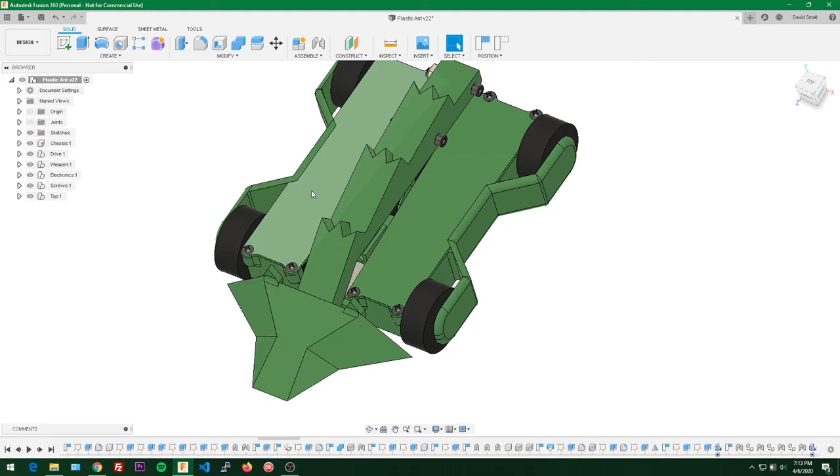If we take a look at this guy, you can see we've got the lifter, the wheels, the cool side panels, the weird fur pattern thing—I'm not sure what that's referred to as—but we can even take the top off and take a look at the guts inside.

You can see we've got our power switch, our battery, receiver, servo, our regulator, speed controllers, and one neat little feature is that the lifter is actually fully functional within the CAD design.

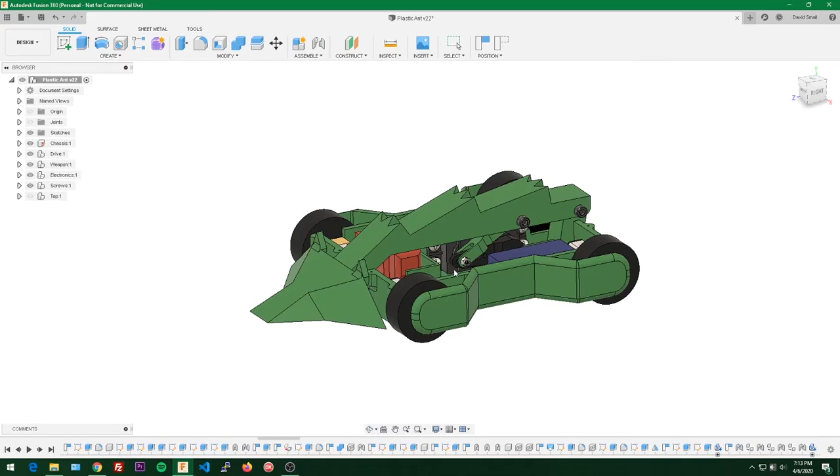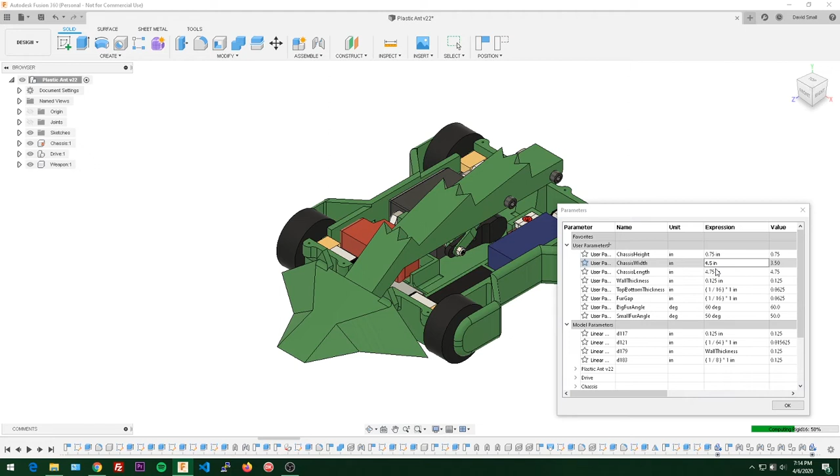And the best part of all of this is that this is fully parametric. Parametric modeling is a modeling technique that uses parameters—parametric parameters, that's where that comes from—variables in other words. I can do something like make the width two inches wider, and the entire thing rebuilds itself all automatically without me having to redo any of it.

I don't have to reposition anything inside. I don't have to reposition where the motors go. I don't have to change where these extrude out from. It does it all for you. That's what makes Fusion 360 stand out so much in the world of free CAD programs: the ability to model things in such a powerful parametric way.

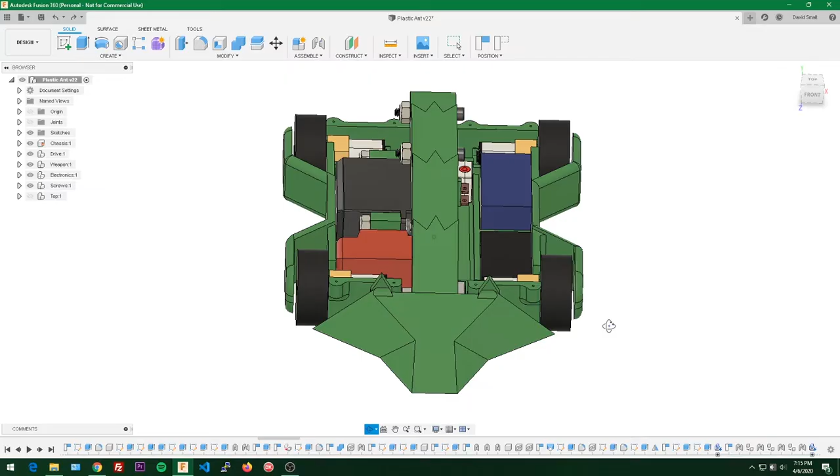So let me put that back. It truly is a fully fleshed out CAD design, and it can be your fully fleshed out CAD design. All you need to do is follow along at home. So without further ado, let's get started on part one of our Foxant Plastic Ant CAD-A-Long.

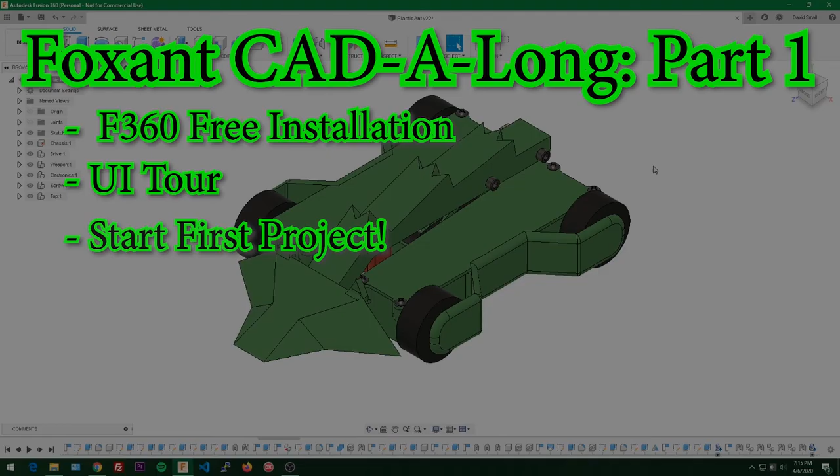In part one, we're going to cover the following things: how to install Fusion 360 for free as a hobbyist, then explore the user interface, create our first project, get started on the chassis, and create some of the inner components. So let's jump right in and download our CAD program, Fusion 360.

Here I am in my internet browser following the link in the description. You do not want to click Subscribe, because that'll put you into a monthly subscription you have to pay for. You don't want Free Trial either, because that lets you use it for free a little bit and then you have to pay for it. Commercial subscription you have to pay for. Startup use you have to pay for. You want to click down here on... just kidding, that's also commercial subscription.

All the way at the bottom here we have 'Activate Fusion 360 for personal use,' and that's what we want to click on. Then on this page, if you already have an Autodesk account, use that, but otherwise create a new account, fill in your information, and it'll take you to this page. If it keeps you up here, just scroll down and click 'Download Fusion 360 for personal use.' That'll start downloading—click it when it's ready, follow the instructions, and then open up Fusion 360 and we'll get started and look around.

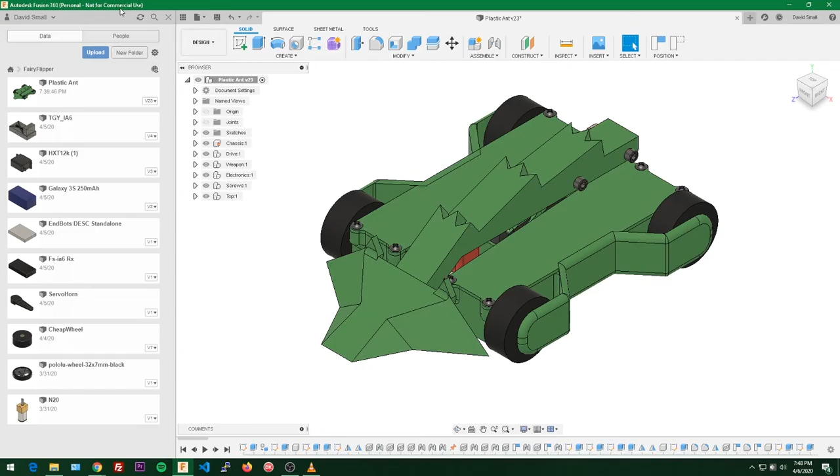So here we have our data panel toggler, that's kind of like our project explorer. Different projects will go in this window here, and we can close or hide that as we wish.

Then we have our typical file menu, save as, save new, open, and so on. Then we have our toolbar up here with all of our various tools. On the left here we have our browser, this is kind of like a file explorer on your computer. We have folders, and instead of files, they're components, and inside of components are more files and more folders.

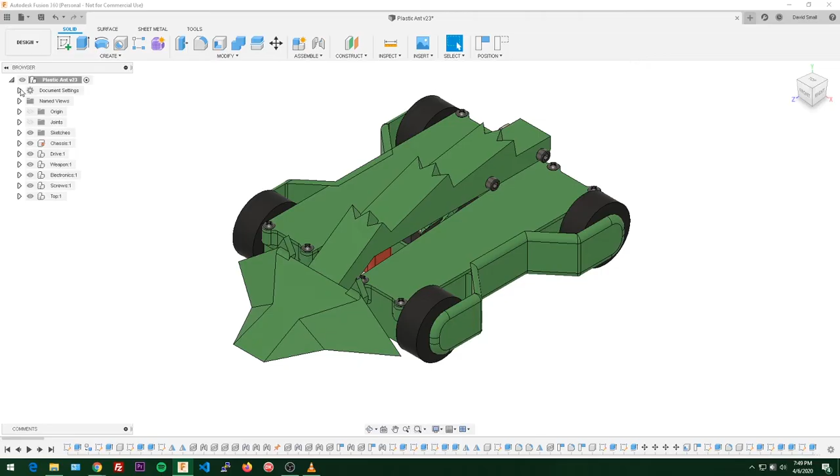So we can look at document settings here. This changes if we want to use inches, millimeters, meters, whatever as our default unit. I'm going to keep it on inch, you can change it to millimeter if you want.

Then we have our named views, we're not going to bother with any of that. Origin is your center in 3D space, you got your XYZ, your various planes. Joints are when you stick components together, so you can see where all those guys are. I usually keep that off unless I want to find one because they're a little annoying and they get in the way. We have our sketches, and then we have our actual components.

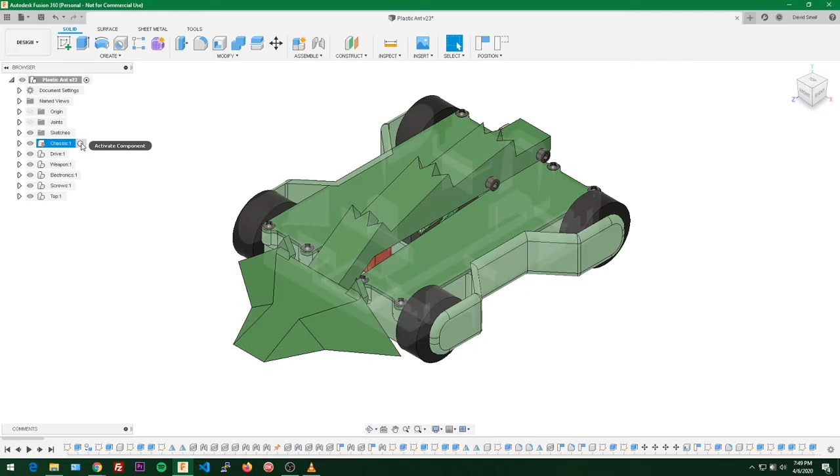So we have our chassis, we have the drive system, we have the weapon, electronics, screws, and the top. You'll notice when you hover over these, this little thing appears, and that eyeball or radio button is what is the active component. So if I were to check this, now our chassis is the active component, and everything else kind of fades away so you can look at it a little bit better.

Whenever you're adding new features to your design, it'll show up in the timeline of whatever the activated component is. So it's really important to make sure that the component you're working on is activated. We'll talk about that more later.

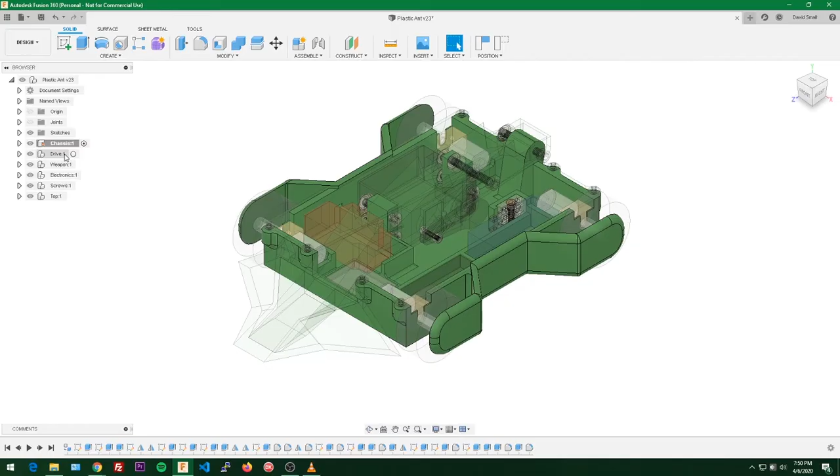Then we have the eyeball over here. So let's say we wanted to hide the chassis, we could click the eyeball there, it disappears. We can make the top disappear also, and we can look inside and check out what's going on.

If we open up one of these, you can see that we have more pieces inside. So inside of top, I have a top panel, another top panel, and then these are the various screws, and I just keep that all in the top section. So it's important to stay organized, use folders, that way you don't have a million different components on your sidebar here.

Now if we go down to the bottom, we have our timeline, and this is every single action I took in making this robot. So every time I made a sketch, every time I extruded something, every time I added a fillet, anything like that will show up in this timeline.

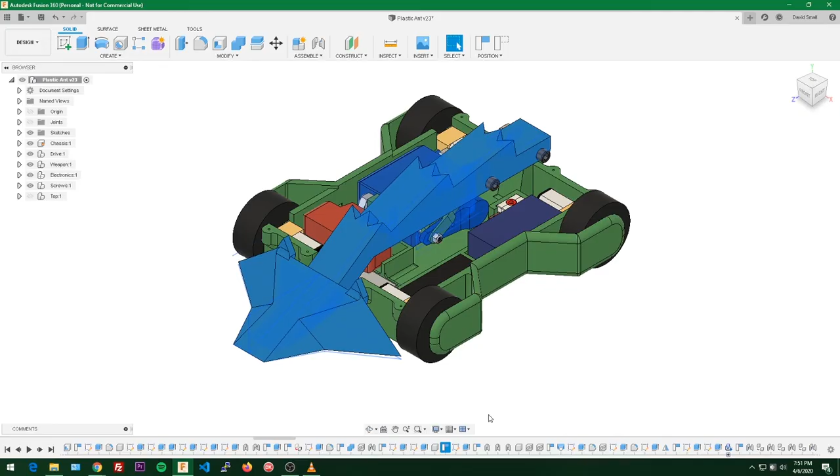And then we can even go down here, right click a random one, and roll the history marker here. And this will take us back in time to when I only had this much of the robot done.

Then we can use these buttons to step ahead, and it shows every step that was done to create this robot. You can even click play here and it'll do a little animation starting from the very beginning all the way to the end, step by step, of every single feature that I added to the robot.

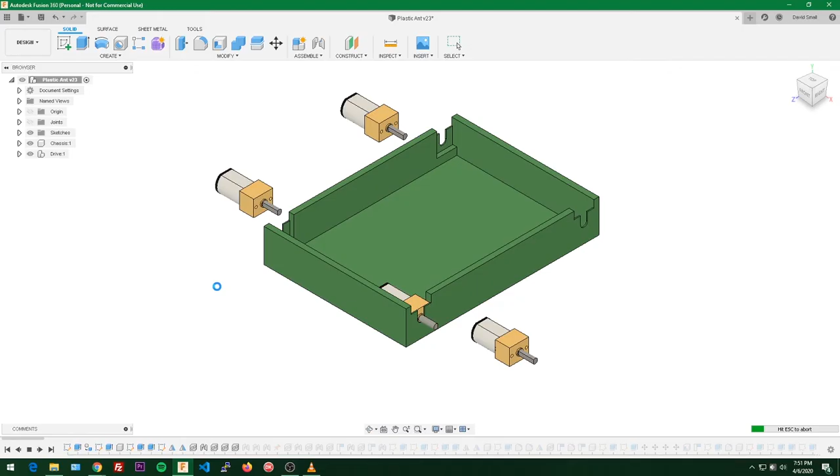And that's pretty neat. And then we can use this button to go all the way to the end of time, so here we are, back to where we were originally.

So now let's talk about exploring our design view. I'm going to take my mouse here, and if you're using a trackpad, you're going to have a bad time. Please go out, get a twenty dollar mouse, you'll be much happier doing this.

So I'm going to hold down the middle mouse button and then move the mouse around, and that lets me pan around my design. Then I can hold shift and the middle mouse button, and that lets me rotate and orbit around the design.

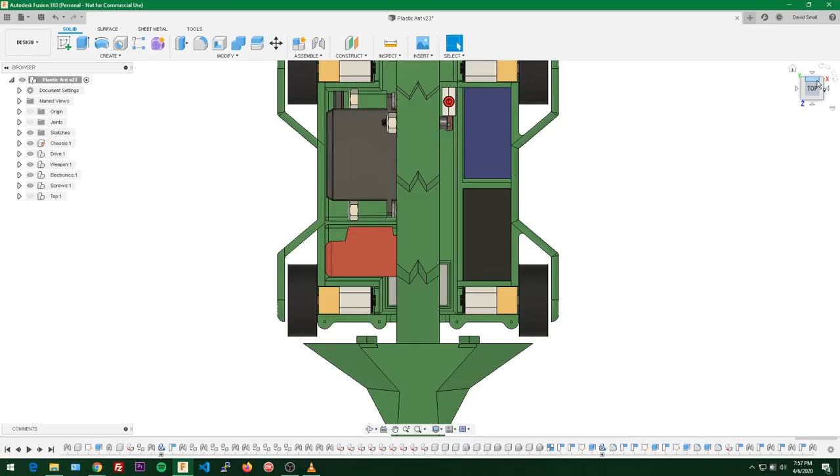You can also use the cube up here. Clicking the home button puts it at your home view, so you can click on top if you want, look at the top, look at the front, look at the left, look at the corner in between the two, all that good stuff. Now you may have noticed that the scrolling is backwards.

It's a personal preference sort of thing. If you don't like that, click on your name, go to preferences, and in this menu go down to reverse zoom direction and check or uncheck it to adjust it however you like.

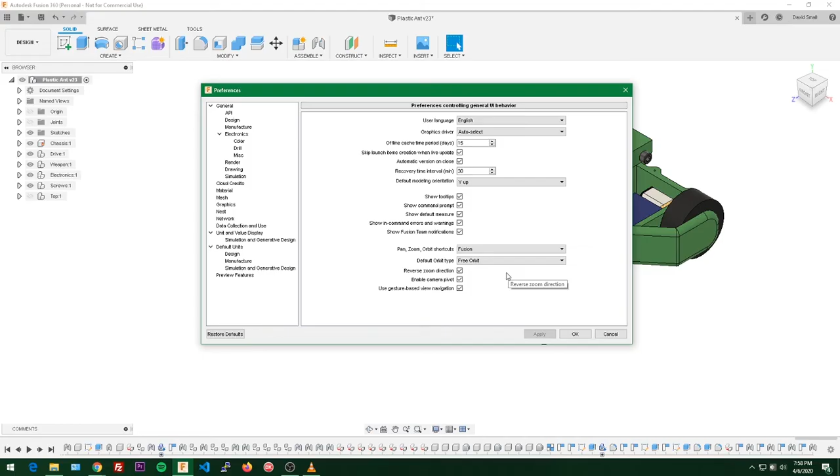With that, I believe we are finally ready to get started actually making something. Let's go to our home section and do a new project, and put in the name of our project. It's Foxic, but it's an ant, so Foxant.

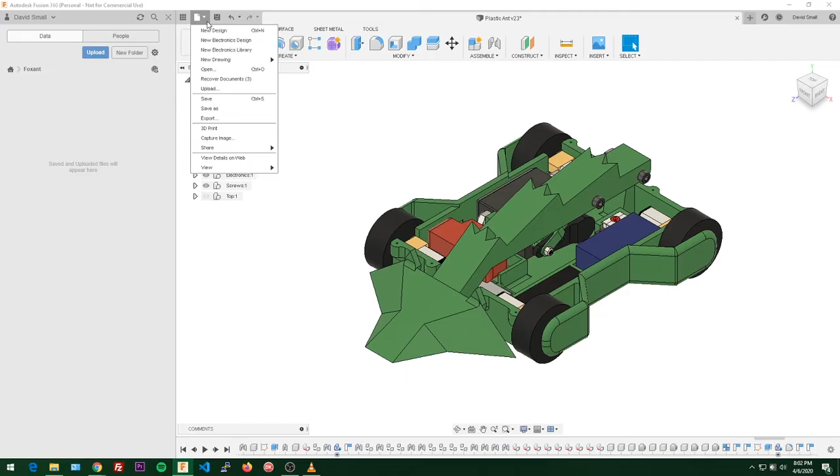Let's open this guy up, and we'll do File, New Design, and here we are. We'll close this one out, because we are all about our brand new design here. So we will call it Foxant V1. You can see here inside the Project Explorer, the file has been added to our project folder.

So now we have our blank canvas. We can get started on making the chassis. The very first thing you want to do when opening a new file is ask yourself, are there going to be multiple pieces or just one piece inside of this file?

We're going to have multiple pieces, which means right off the bat we're going to want to create a new component. So let's right click this guy, new component. That's how I brought that up. Then we'll double click on it to change the name, and let's call it chassis. Then we'll right click it again, make another component, and let's call this one electronics.

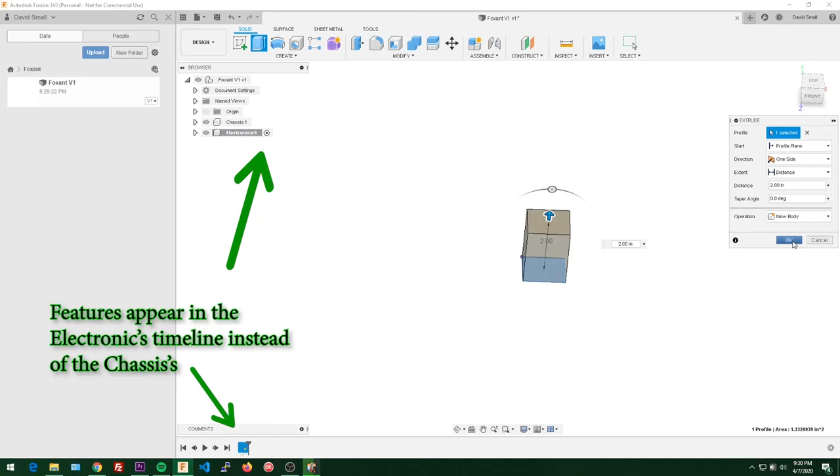So now we have two pieces of our robot. Now it's important to make sure you have activate component on the correct component that you're working on. So if I were to be working on the chassis and I added a sketch and started doing stuff in here, I'll make a little cube real quick, and that's my chassis.

If I look at the timeline, you can see I created a sketch and then extruded it. But if I wanted to know specifically what did that, I would click on the activate component here, and there's nothing in here. That's because I had the wrong component selected when I made that sketch and did that extrusion. So I'm going to go ahead and delete those real quick.

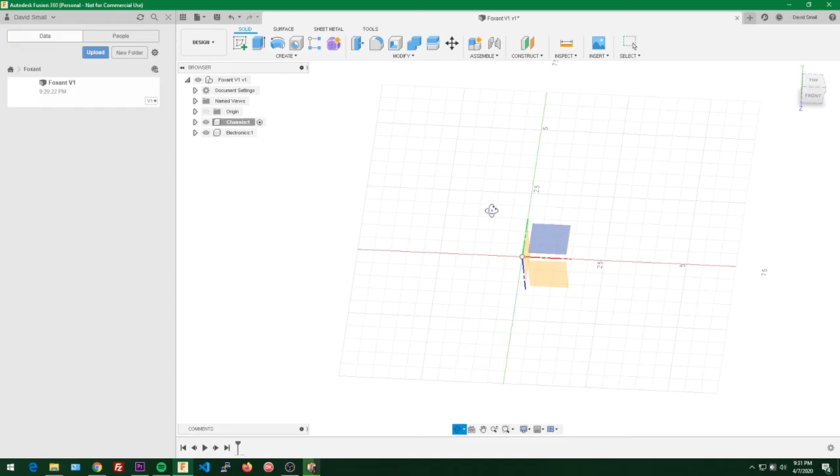With the correct component activated, let's make a new sketch. We can do that a few different ways: use the create sketch button up here, or push S on our keyboard to bring up the shortcut menu and do create sketch from there, or type sketch and do create sketch that way.

So the next thing we're going to do with the sketch tool selected is pick which plane we want our sketch to appear on. The way sketches work is you draw it out and then extrude it to create a 3D object. I'm going to choose the bottom here, so we can CAD sort of like a top-down view and then extrude that into a 3D object.

With the sketch now created, you can see we're in the sketch menu. We have all these different geometry tools and constraints and a sketch palette over here on the right. So we're going to make a box basically.

I'm going to push S on the keyboard and use this center rectangle. If you don't have that there, you can type center rectangle and it'll appear. So we'll click on that. The first thing we want to do is create where we want our center point to be.

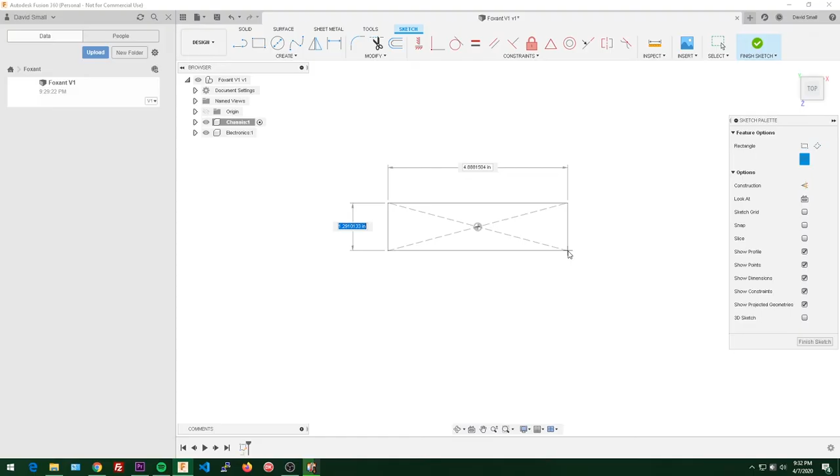There's not really anything going on here except for the origin, so we're going to go ahead and put our rectangle there. Then I'll move the mouse to get an idea of how big we want this to be—something like that roughly. And I'll click again to confirm it.

Now the rectangle tool is still active, so if I were to click again, it would make another rectangle. I don't want to do that, so I'm going to hit escape on my keyboard, and that'll let us use our mouse normally to click on various pieces of geometry. So we have this cool little box.

The lines are all blue, as you can see, and blue lines mean that they are not constrained. We can grab them with our mouse and move them around and stuff like that, and that is not what we want.

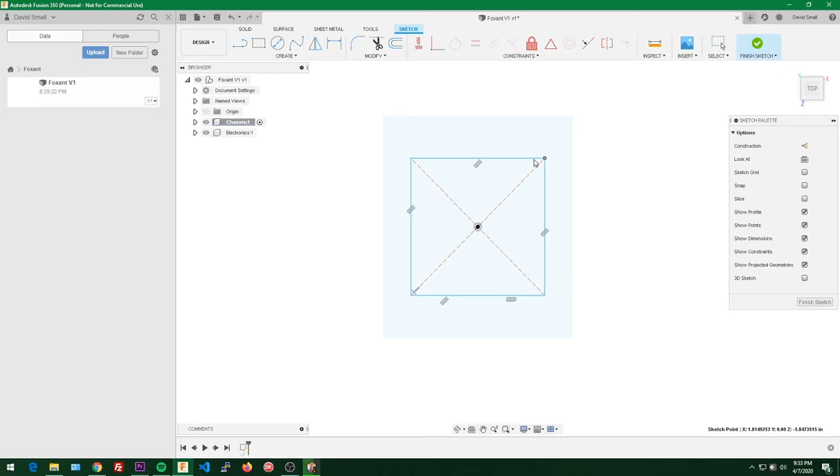We want every sketch we make to be fully constrained or fully defined, and that means the lines are black. So how do we make the lines black? We do that by constraining them, using various things up here or adding dimensions.

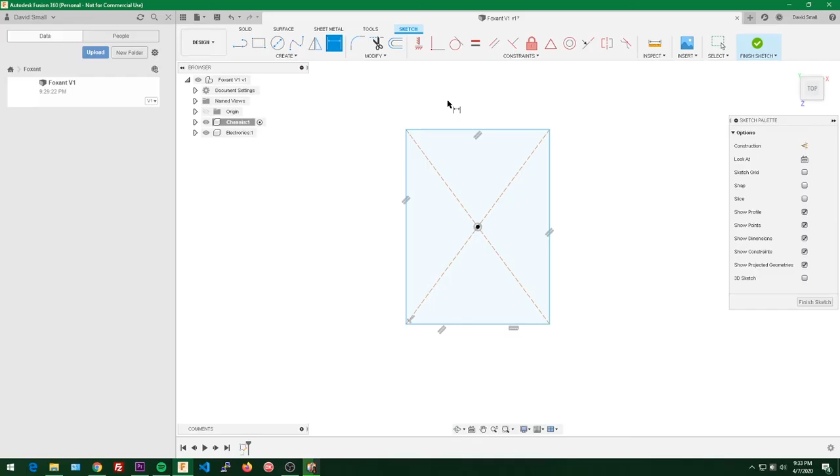Let's add a dimension to this line. I'm going to push D on my keyboard for dimension—you could also use the button there—and click on the line I want to define. Then, moving the dimension to where I like it, I'll click again, and now we have a little box asking how wide we want the line to be. So I'll type 3 and hit enter.

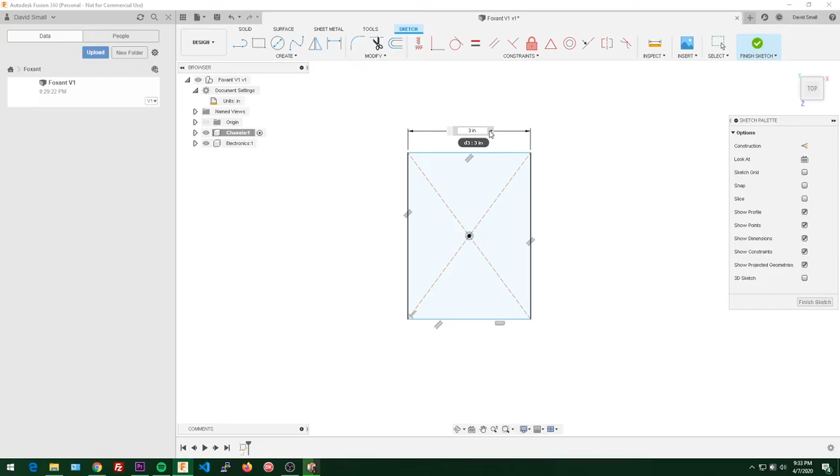And we have a cool little line. Now, 3 what, you might be asking? We are looking at 3 inches because that is our default unit. If you had millimeters as your default unit, it would be a 3 millimeter long line. But even though inches are the active unit, I can change this to millimeters if I want—that makes a really tiny square.

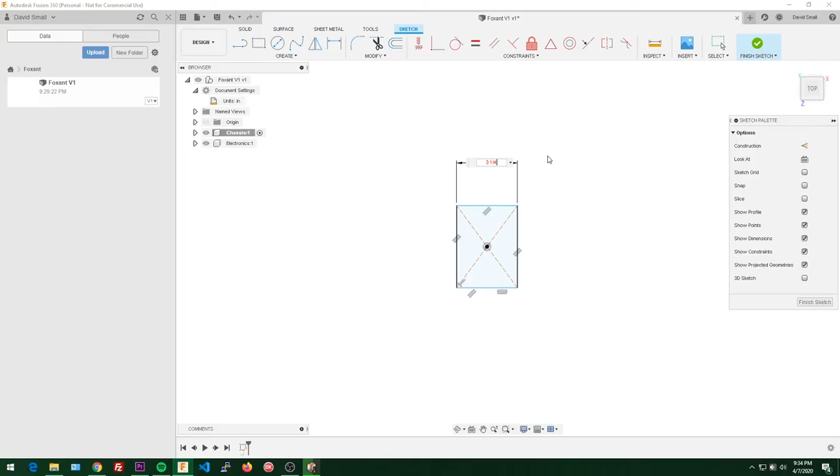You can type all sorts of different things in here. You can do 3 inches like we did earlier. You could do a decimal like 3.5, a fraction like 1/2, a decimal like 0.75, or even a mixed number like 3 1/4. Pretty much anything you type will appear as a value in inches.

So let's put that back to 3—I'm double clicking on this to edit it—and then I'll push D again to define this line as well, and we'll also make that 3. With those two dimensions, you can see our square is fully constrained. I can't grab and move it around anymore, and that's exactly what we want.

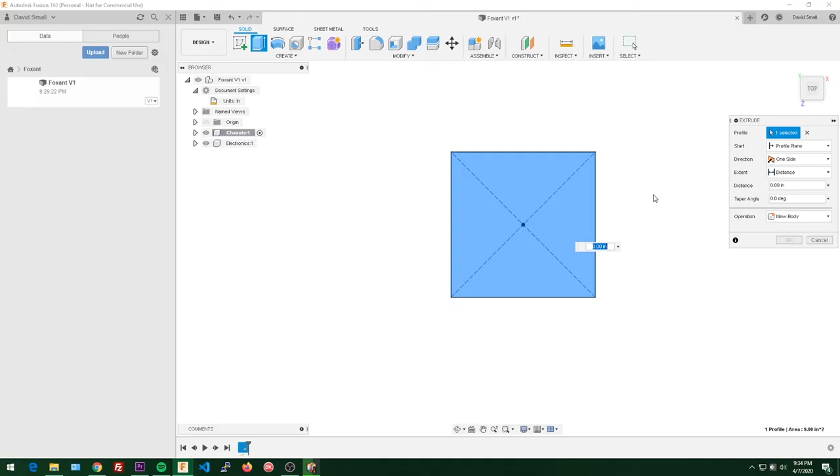So let's make this a 3D object. We can do that by pushing the E key on the keyboard for extrude, and it automatically selected the profile I wanted—but if it wasn't selected, you'd just click on it. I'll hold down shift and the scroll wheel again and move my mouse so you can see what's going on here. This little arrow appeared that I can grab, and when I move it around, it creates a 3D object using that sketch as a base, and this extrusion determines how tall it's going to be.

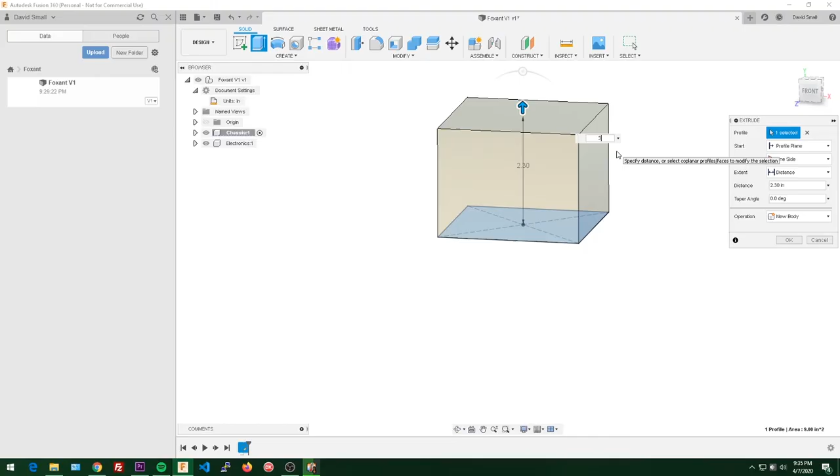So once again, I'll type 3 in here and hit enter, and you can see I made a cool little 3 by 3 by 3 cube. You can also look down here to the timeline and see that the sketch and the extrusion we added are in the chassis. So that's all pretty cool.

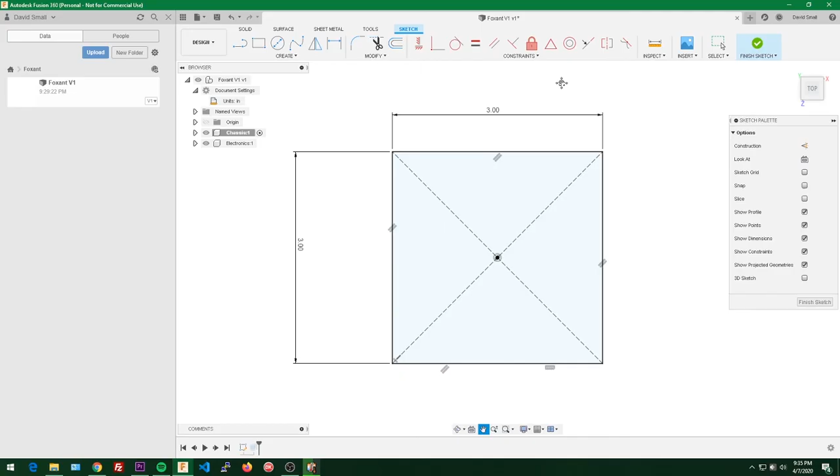Now, what if we made a mistake and want to go back and change the size of this cube? Well, we can go back to our timeline, double click on the sketch, and it puts us back into that sketch. So maybe we wanted a 2.5 inch wide rectangle and a 4-inch long rectangle. Then we hit finish sketch again, and you can see it extruded with that new pattern. This is very handy for when you want to go back in time and make changes.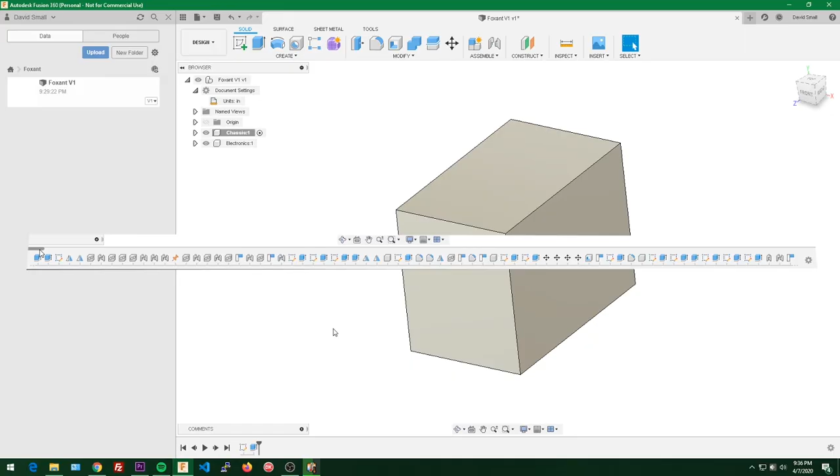Now, if you remember my timeline from the finished robot, you saw there were hundreds and hundreds of different objects in the timeline. So if we wanted to make a change in something like this, we'd have to scroll and scroll and scroll, and it would take forever to find.

So we're going to take this one step forward and add what we call parameters. Hitting S again and typing change, we'll go to change parameters, which lets us add parameters to our project. We'll hit the plus to add a new one—let's call this inner chassis width, make that 3 inches. Then another one, inner chassis length, again 3 inches—no, let's make it 4, so it's a little different. And another one, we'll call it inner chassis height, and let's just make that 1 inch.

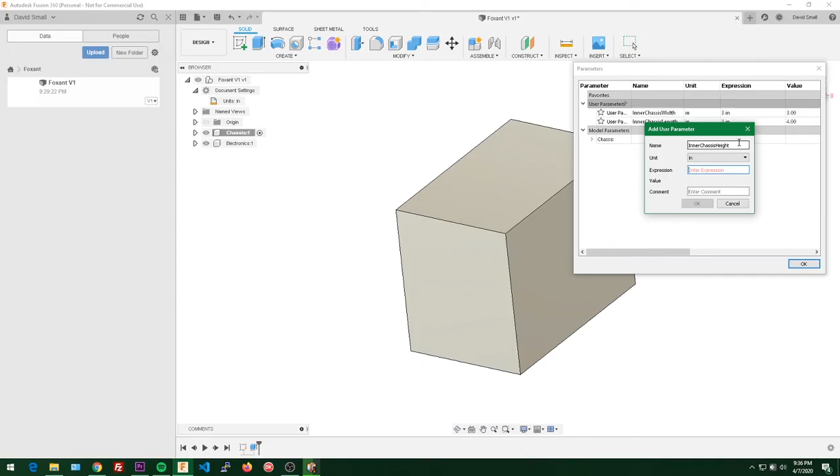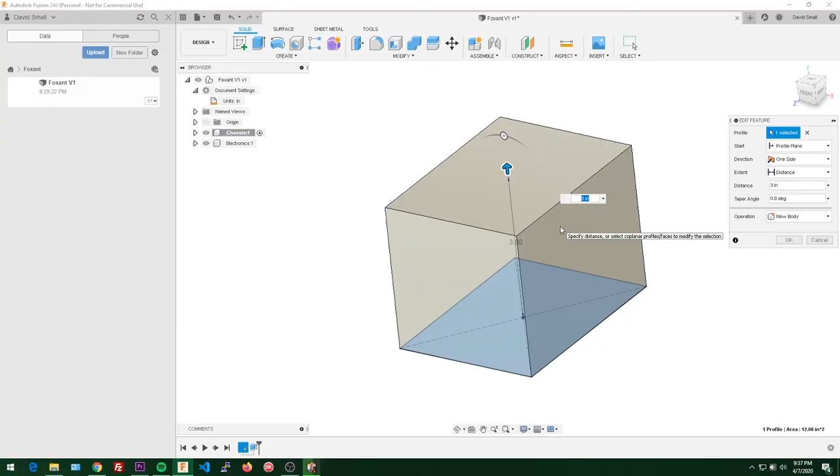So now with those parameters made, we can close out of this box, go back into the sketch, and instead of typing a number in here, we can actually use those parameters. So let's do inner chassis width, inner chassis length, hit finish sketch, and then we'll change the extrude to use inner chassis height. So now we have a 3 by 4 by 1 inch box that is defined with parameters.

So now when I want to change these, I don't have to dig through the timeline. I can just go to the change parameters menu and edit these directly in here. Let's make it 5 inches long and 4 inches wide. You can see they change all by itself automatically without you having to go back and find anything, which makes updating things you change often very simple.

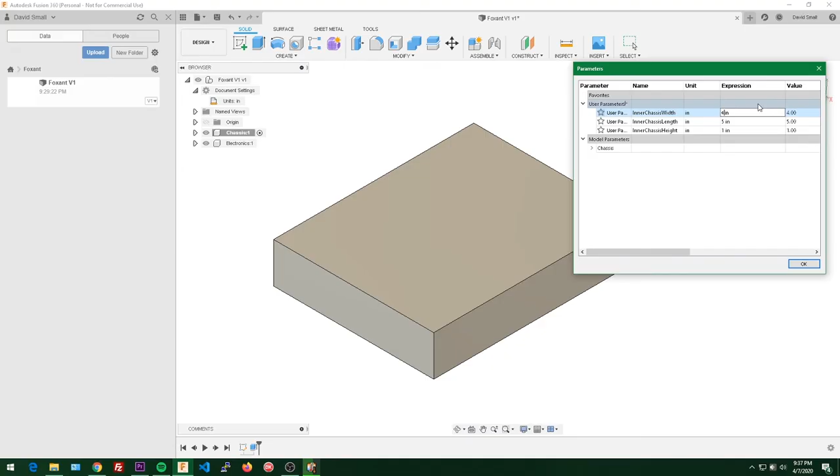So let's actually make that back into what's more realistic for this robot. Maybe 3 inches wide, 4 inches long, and we'll keep 1 inch tall. And now we have a neat little parametric box.

Now this chassis is looking pretty cool, but the biggest problem is that we can't fit anything inside of it. It's solid, we can't actually get any parts in there. So we want an open box basically.

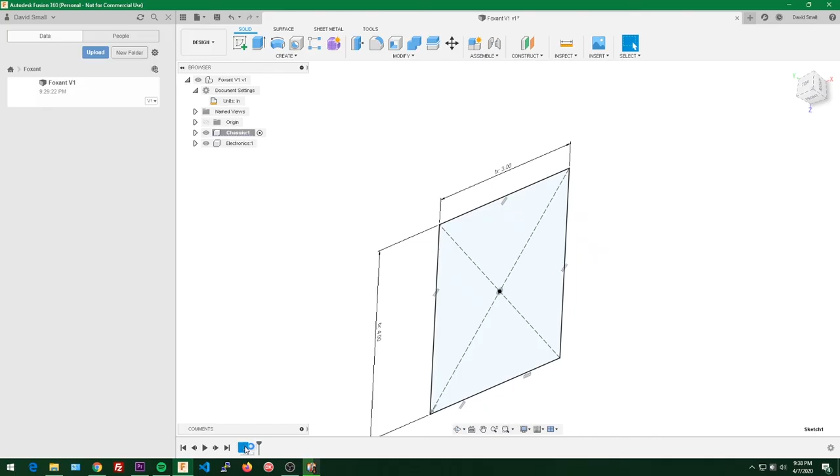So let's go back into our sketch and create what is called an offset. Pushing O on the keyboard lets me select a region, and then I can either make it smaller or bigger than what it was originally. I'm offsetting it into a different size. You can see when you make the new offset larger than the original, it uses a negative value, and when it's smaller, it uses a positive value.

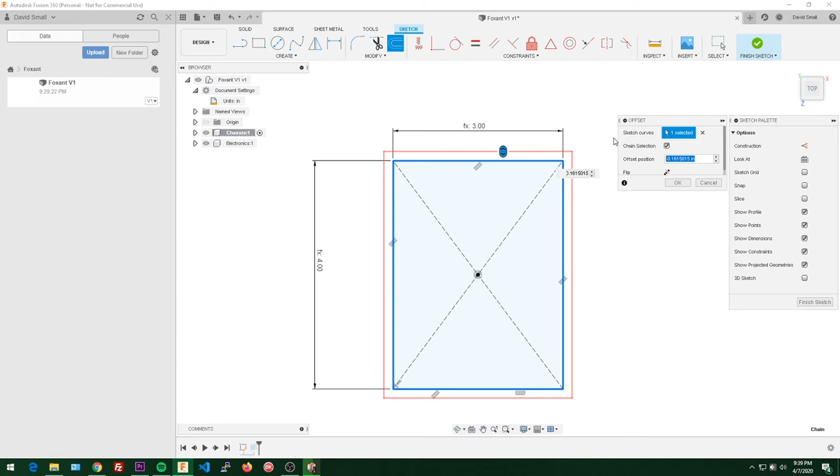So let's make this -1/8 of an inch, and you can see that creates a 1/8 inch thick wall around our chassis. Now remember, we named these parameters inner chassis width, so the space between the inside and the inside on the opposite wall, not the space of the outer part.

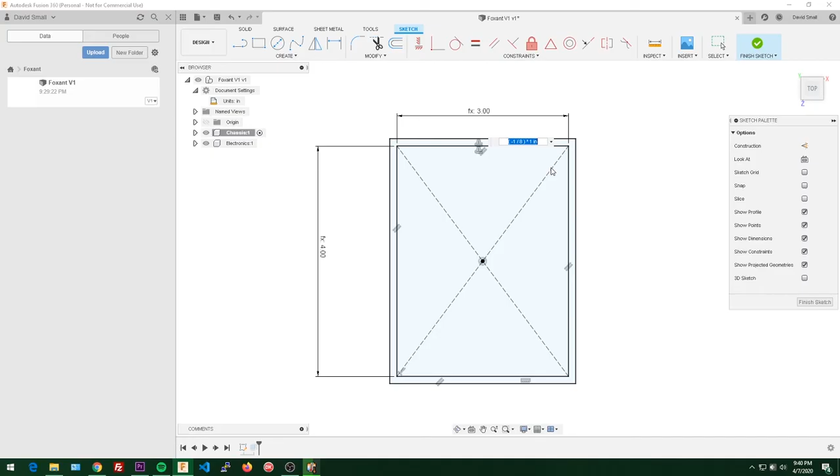So that's why I called it inner, just for that clarification. Now I think the thickness of these walls is going to be something I change often, so I'm going to make another parameter and call it wall thickness, and set that equal to our -1/8. Then we'll change this dimension to be wall thickness, and now we can change the parameter if we want to make this thinner or thicker. So maybe we change it to 1/4 later on, and it makes that wall thicker all by itself. I'll put that back to 1/8 for now.

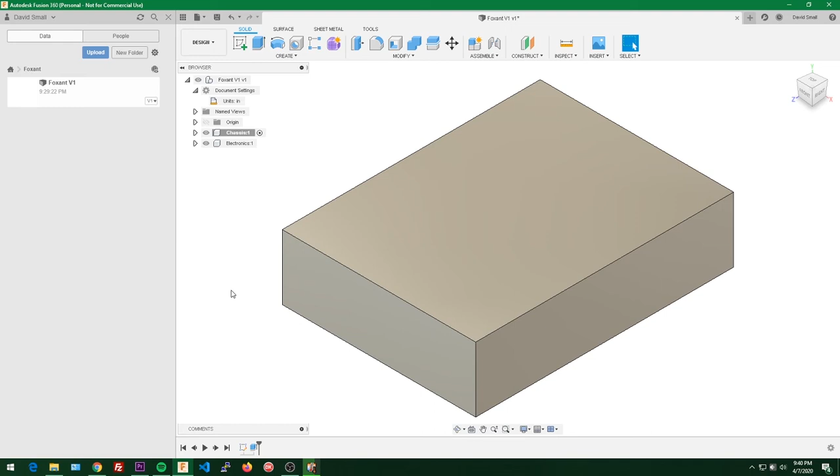Hit finish sketch, and you can see our box doesn't really look any different. So we're going to have to go back into our extrude, and you can see how it's extruding the middle part, but not the outer part. So I'm going to click on the middle section to deselect it, and then click on the outer bit so it extrudes only that part of the sketch. Then I'll hit OK, and now we have a cool little parametric wall that we can put all of our parts inside.

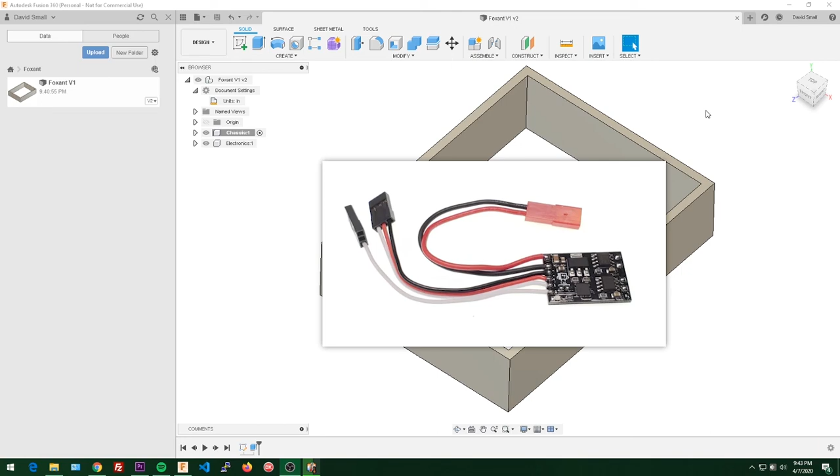The next thing we're going to do is add one of the electronic components to our robot, and let's start with the speed controllers. So I've decided to use the Endbots DESC, just because this is a speed controller I like.

There's a few different ways to import an external part. You can either download a CAD file of that part and import it, or you can use measurements provided by the vendor to make it yourself, or you can, as a last resort, order the part and physically measure it and then use those measurements to make it yourself. So we're going to do the second option.

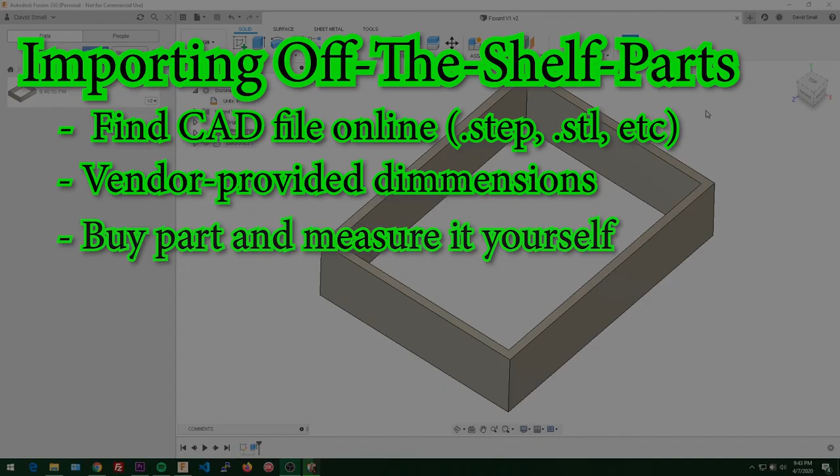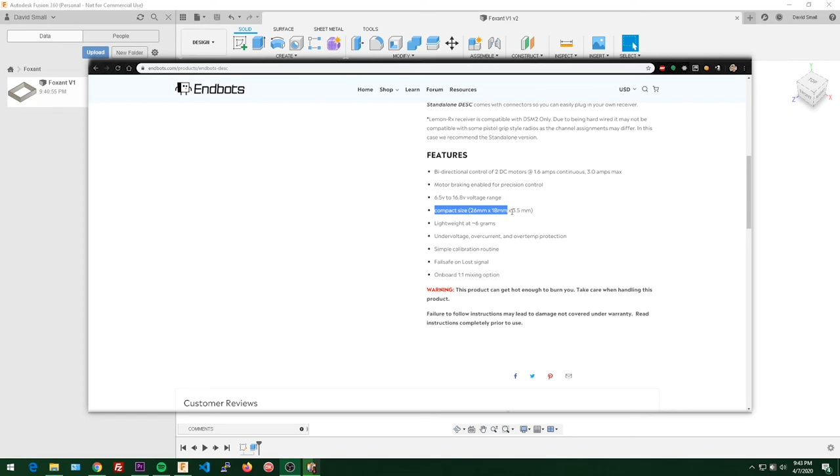We're going to head on over to Endbots' website, and if we find the speed controller, we can scroll on down, and you can see here that we have the dimensions for the length, the width, and the height. So we're going to use those values to make our speed controller design.

Now, when it comes to creating a lot of parts inside of Fusion, there's some debate as to whether you should have everything inside of one file or split as much as you can into separate files. I've kind of come up with my own rule: if this part is never going to change size or shape, I'm going to put it in its own file. Otherwise, I'm going to keep it here in the main file where I can do all the parametric magic on it.

So since the speed controller is an off-the-shelf part, it's never going to change size or shape. I mean, sure, a new version can come out years from now, but for the most part it's not going to change. So we're going to make it into its own file, that way we can reduce some of the clutter of our main timeline.

So I'm going to go up here to File, do New Design, and save it and call it EndBots DESC Standalone, and hit Save. Now you can see over in our Project Manager, we have another file in here.

Now earlier I said, what's the first thing you do? You ask yourself if there's going to be multiple components or just one component. Since we're just using one component, I'm not going to make a new one. I'm just going to use this as our parent component, and I will make a new sketch like we did before.

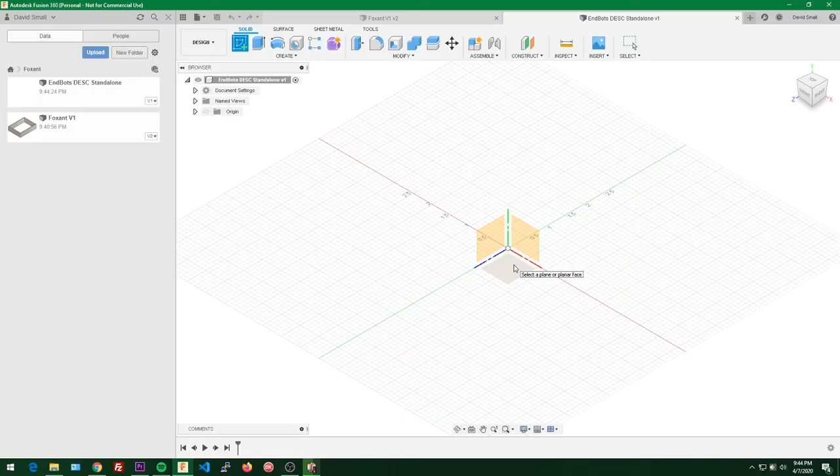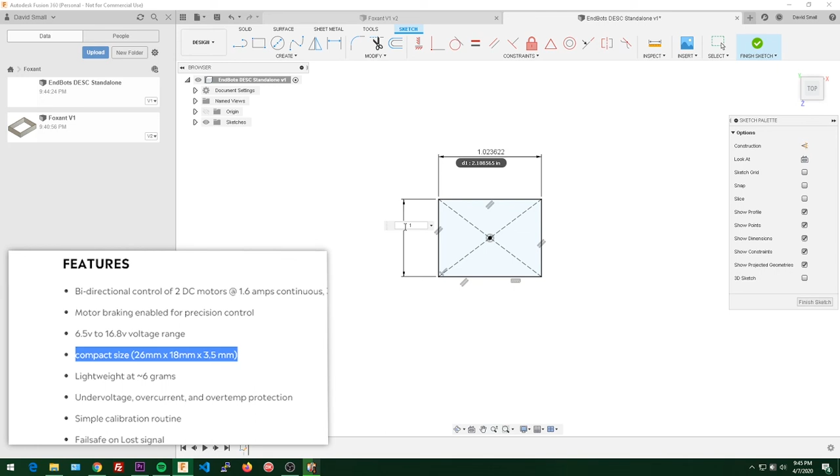I will use the S key to create another rectangle, and I will define these using the website. I'm going to push D and define the length, which is 26 millimeters. Then I will define the width, which is 18 millimeters. And then I'm going to push E to extrude all of this up to 3.5 millimeters. And there we go, we have a super basic model of what our speed controller will look like.

That's as good as we need it to be. We don't need to see the individual transistors and the solder joints and anything like that. This box gets the job done.

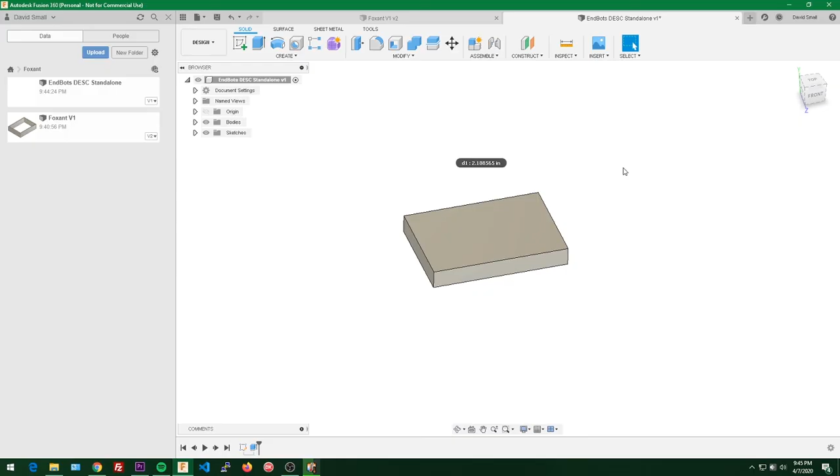So let's save that, and then I'm going to go back to our Foxant project. With electronics as our active component, I will just drag our speed controller into the project, and just like that it is included. If we open up electronics, you can see that the EndBots DESC has been added.

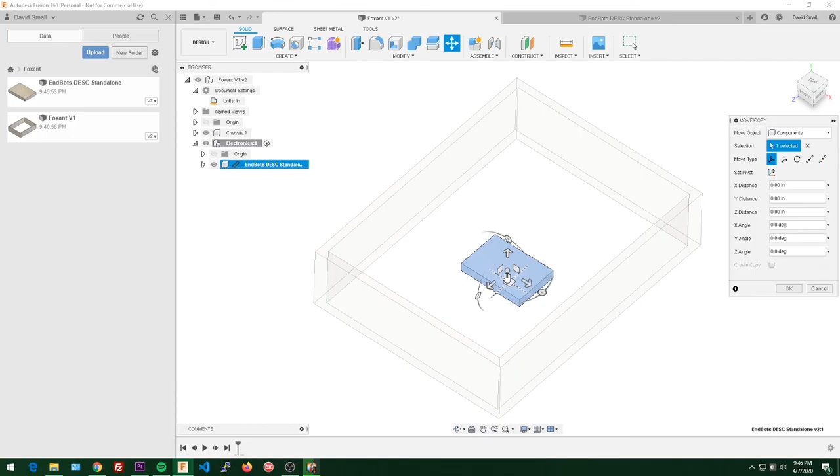So it's giving us the prompt to kind of move it where we want. I'm just going to leave it towards the front and hit OK. Now with the Foxant as our active component again, so we can see everything, we have a box with a smaller box, but that is our chassis with a speed controller inside.

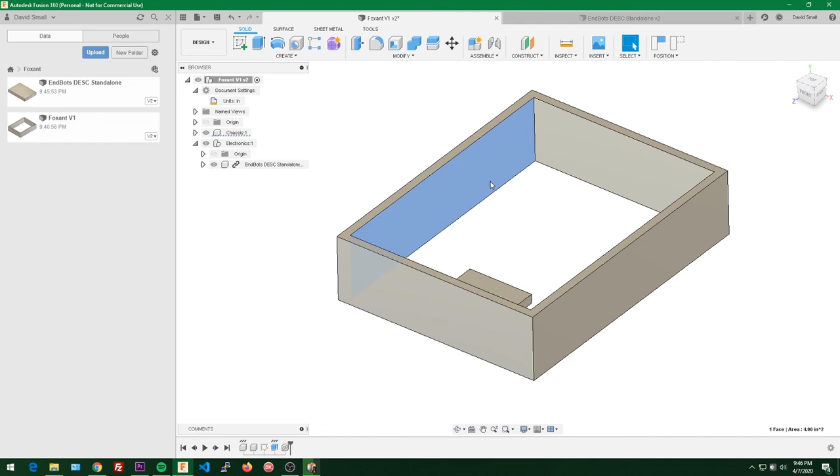So let's add a floor to the chassis. I'm going to do that by once again making sure chassis is the active component. We don't want it to be the parent component, we want chassis. And then I'm going to use shift and the mouse wheel to orbit around to the bottom.

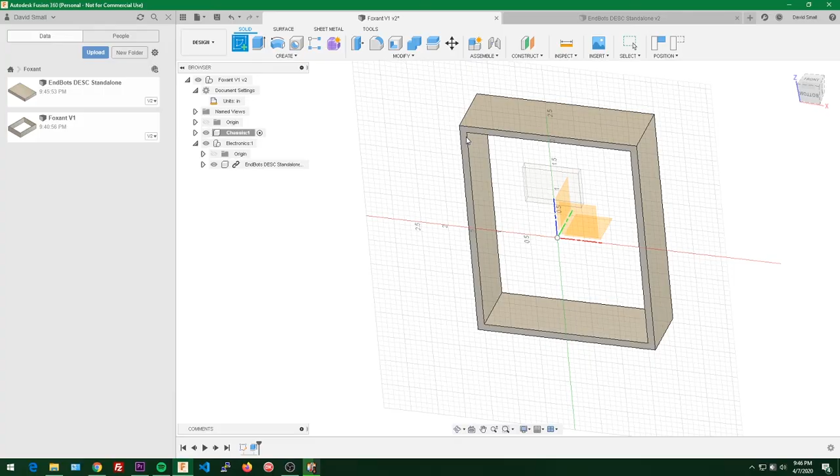And I'm going to create a new sketch, but instead of using one of these default planes, I'm actually going to use the bottom of the robot itself as a plane. Now this thing that just popped up is asking about this component that I moved.

If I want to capture that position or ignore it, if I hit continue, it just bounces back to where it was. If I were to hit capture component, it would show up in my timeline as a move command. And since that's not important, I don't want it there clogging up space.

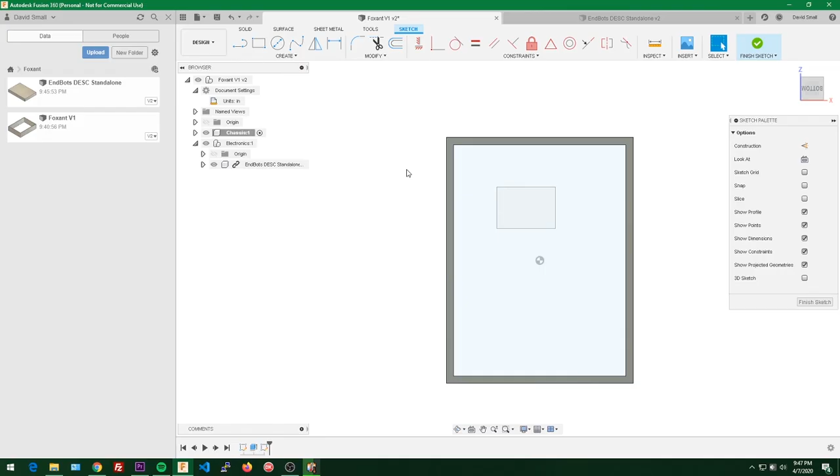So let's add a floor to this chassis here. I'm going to hit extrude, and I'm going to select the outer border and the inner border this time. Now we can add a bottom bit to our box. So I'm going to make this 1/8 of an inch and hit enter. And now we have a little box for our speed controller to sit in.

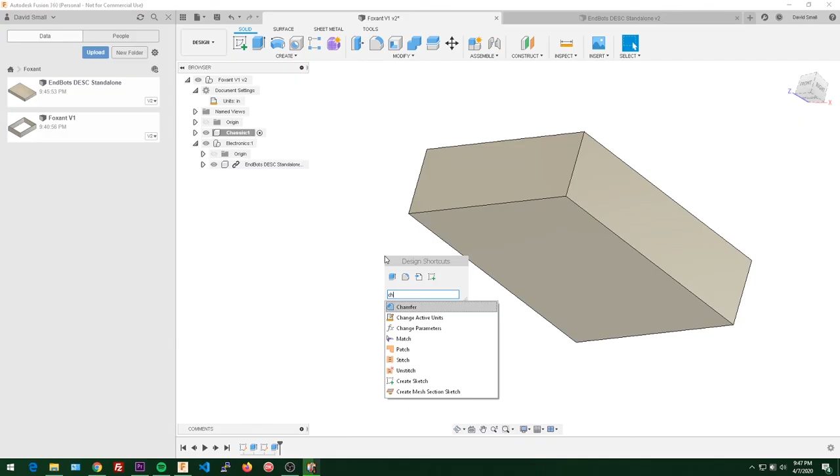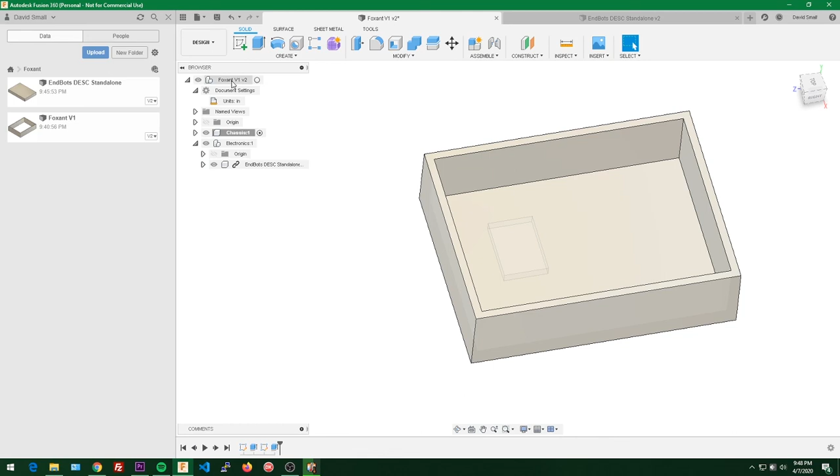Now, once again, I think the thickness of this base plate is going to be something I change fairly often. So I'm going to make yet another parameter, and I'll call it top bottom thickness, because I think I'm going to use the same thickness for the top plates, and we'll make that 1/8 inch as well. So now let's re-edit this extrude to use top bottom thickness, and there we go. Now we have a parametric box with a smaller box inside of it.

And actually, now that I see this thing, I think I'm going to go back to making this 3 inches wide. And as you can see, it's very easy to do and automatically updates for you.

All right, so that just about does it for part 1 of this Foxant CAD-A-Long. I know we didn't really do much in this video except for make 2 boxes, but now that the intro stuff's out of the way, we'll be able to do more CADing per video.